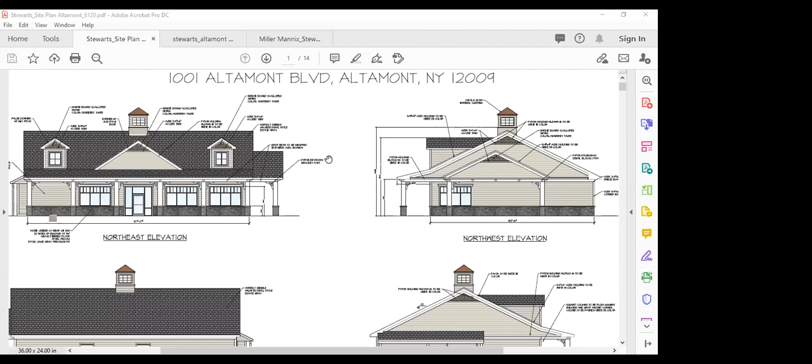So as you can see, and I'm assuming you see my screen - yes. On T1, little things: we removed the gooseneck lighting and replaced it with a solid LED bar. There was some confusion about the sign at the last meeting - again, this sign does rotate or scroll to the price and then stays affixed at that price. It's not a constantly changing message board.

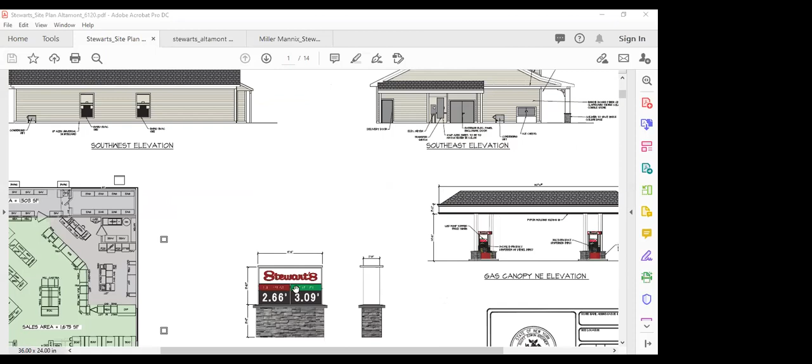Chuck, why did you change that from the gooseneck light into an LED bar light? It was just an internal switch. We felt it cleaned up the sign. It didn't change the light emitted. We can go back if you want, but there's no gooseneck lighting anywhere else on the site, so we just removed it. Is there an LED bar light anywhere else on the site? There's not, but we had to light the price somehow, and that's how we saw it best to do.

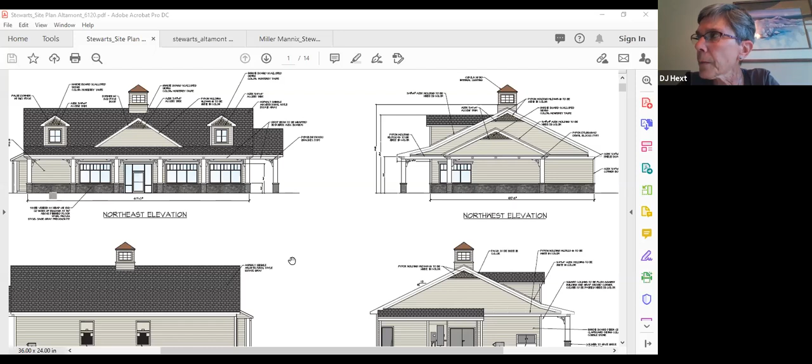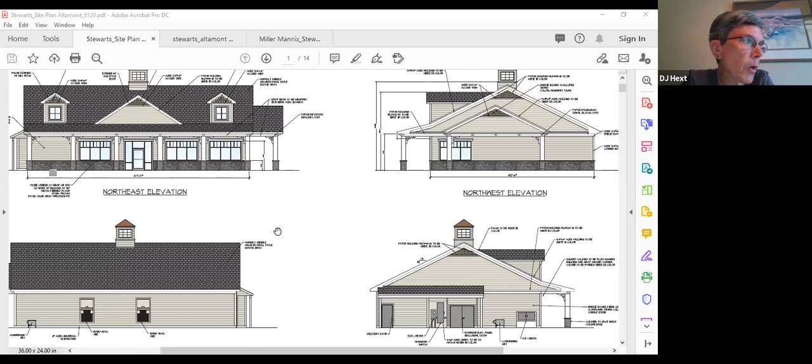From our perspective, it doesn't matter gooseneck or the LED bar. We can take a poll on this a little later. I'll make a note of it, but I don't want to hold you up - I think that's something we should come back to. Yeah, with any of these, you can do them now or later - obviously that's the board's discretion, but I'll continue and let you. Well, what does the board think about that? Gooseneck or LED bar light on the sign? Barb?

Either way, I think that the LED would be fine.

Connie? I don't have a strong opinion. The LED or the gooseneck seem to focus more of a spotlight on the sign versus the LED overhead. I would imagine it's more like what you'd find in a shop or a store. But I guess without seeing the lighting difference, it's sort of hard to tell if I prefer one to the other. Okay. John? Well, if Chuck says it emits no greater light, that the

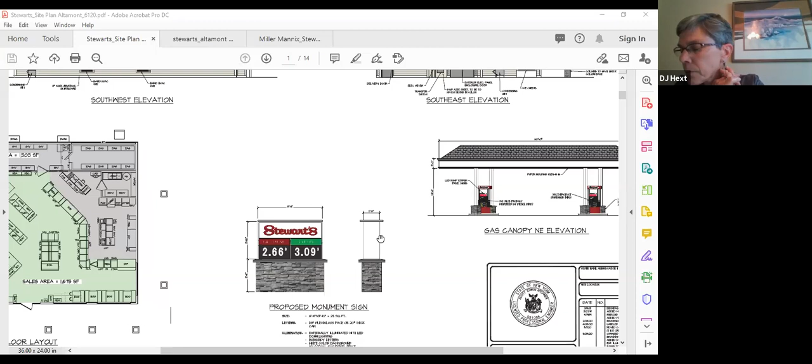Light emittance would be the same, I don't have a preference. It looks cleaner without the gooseneck. However, I would go with whichever has a lower light emittance. Steve? I sort of lean the same way as John. I think the gooseneck would, the LED probably is a little bit more of what I would prefer to see, but I have no feelings one way or the other, which is one is worse than the other.

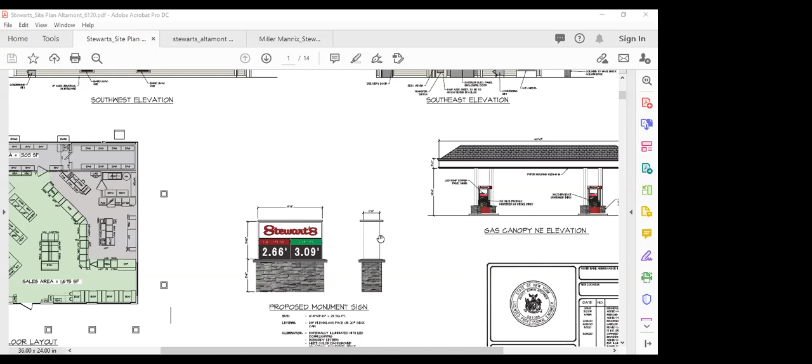It's whatever the group decides. All right, then let's leave it like it is for now. Thank you, everyone. Okay, go ahead. That's fine. That was easy.

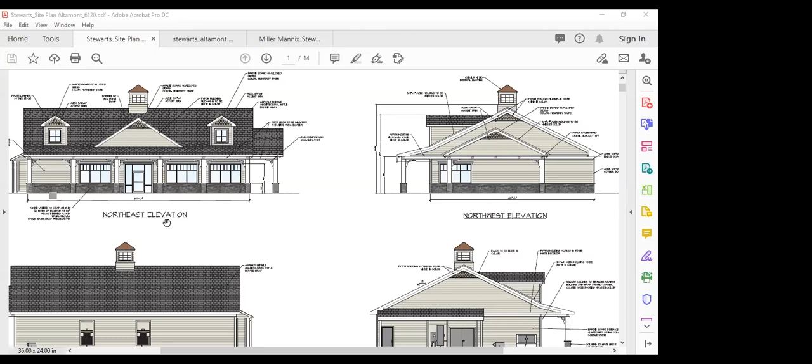The building elevations have been altered to incorporate a bluestone veneer. Again, in attachment 1, this is the closest stone we could take from the Homefront Cafe. I'm also pretty sure it's close to the small retaining wall that's in Orsini Park. So the bluestone has been chosen as the stone. We then incorporated that in the freestanding sign and the canopy column, the canopy columns at the gas pumps. We did incorporate scalloped shingle in the peaks of the dormers.

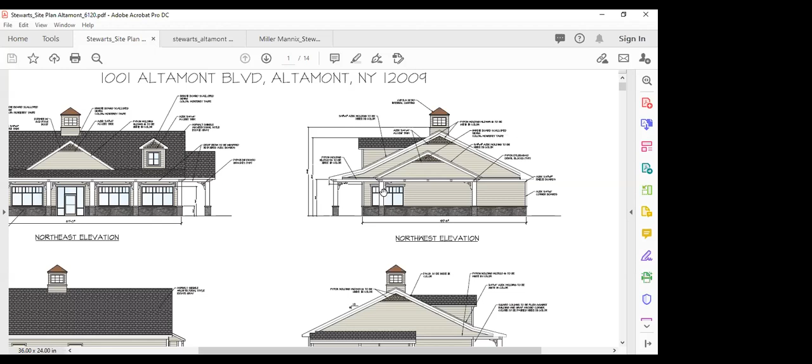We removed the smaller brackets and placed larger brackets where each column meets the roof, and dentil blocks along the roof rake. There was some discussion at the May 18th meeting or the meeting before about the cupola, and we did add a note to indicate that there will be no lighting for the cupola, so no internal illumination.

There are no changes on S1 or S2. S3, we did indicate that the wood frame dumpster would replace the white vinyl. We eliminated the plantings along Altamont Boulevard and installed the benches.

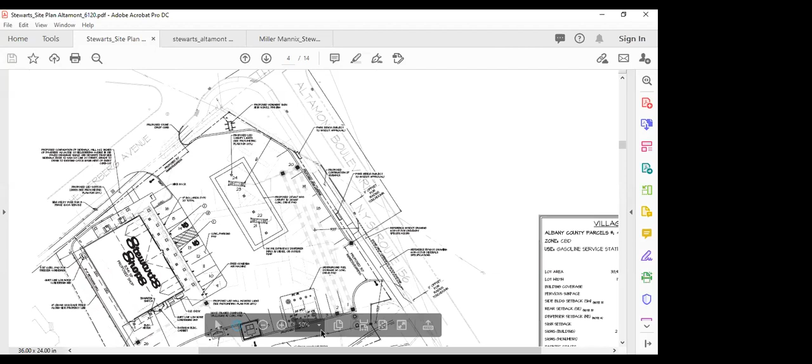One of the things I think will come up again, or as the board desires, we can handle now. Anything on the northern or outside of the dashed line really requires New York State DOT approval. So, this is our site plan, but anything outside of that may require a use and occupancy permit from the Department of Transportation. So anything that we include or show may or may not be permitted under their guidelines. And there's a fair amount of discretion that they have.

We have submitted the phase 2, and I believe maybe even phase 3 of the New York State DOT permit. In the correspondence shared for the last meeting, they are fine with the access configuration as proposed. And we're down to kind of just the details for them to issue the permit. So one of the things I think there's a little bit of a concern with was the benches, as we would like to use the benches. And again, we cited or selected benches that are seen in Orsini Park or outside the Park Row Apartments. These benches may or may not be permitted under the DOT permit.

So if the board would like to address the screening along Altamont Boulevard, I think now would be the time to discuss it. Yeah, I definitely think we need to do something as far as screening. I had sent you an email, you and Dan, an email the next day, that we need to put some type of vegetation screening back in there so that we don't have this huge expanse of macadam.

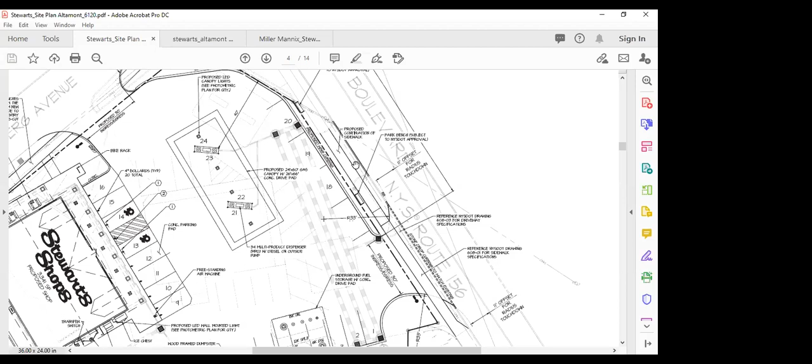The idea was that if you take the sidewalk as shown, where it's parallel with the curb along Altamont Boulevard, and move it behind the curb, basically getting rid of the snow storage area between the curb and sidewalk, it would be the same cross-section as you find on the north side of Altamont Boulevard, right across the street. That provides more room behind the sidewalk and the Stewart's lot for benches and plantings.

Does that make sense? I thought that was an excellent idea, Dan.

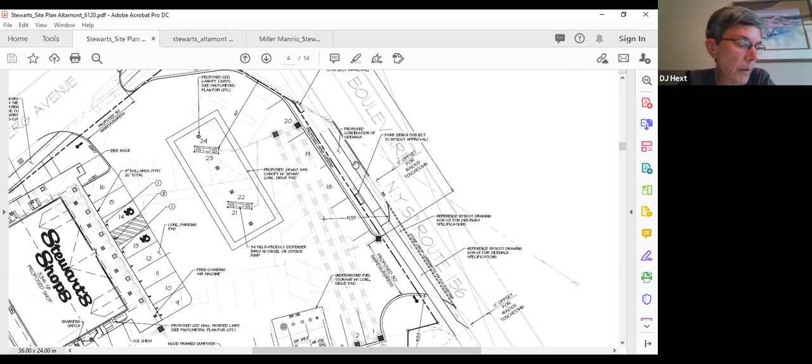The handicap ramp at the eastern end of that curb extension would still have to have the 5-foot landing at the top for ADA requirements, and then the sidewalk can taper 45 degrees and go right behind the curb the length of that extension, then taper back in when it gets toward the intersection. That would provide more room between the benches for plantings in that area, and I know it would be contingent upon DOT approval.

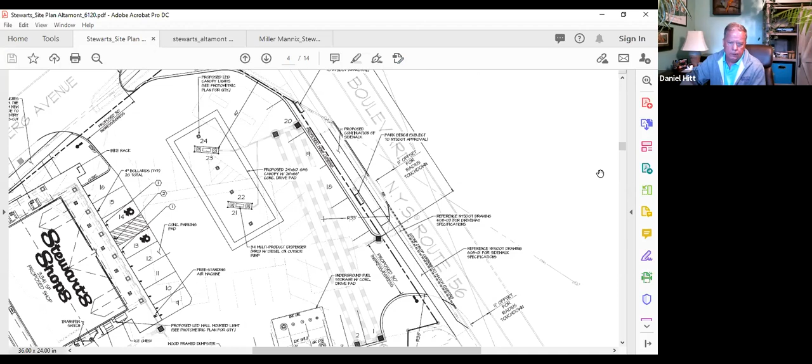I'm aware of it, you said that in your email. Yeah, shift the sidewalk to the curb, and that would provide more room behind the sidewalk and the Stewart's lot to put some plantings in there with the benches, and put the benches on concrete pads, so you're not having any plantings trampled down by people walking through there.

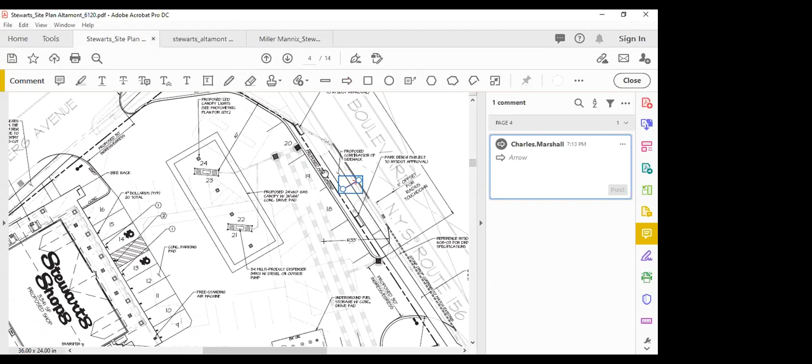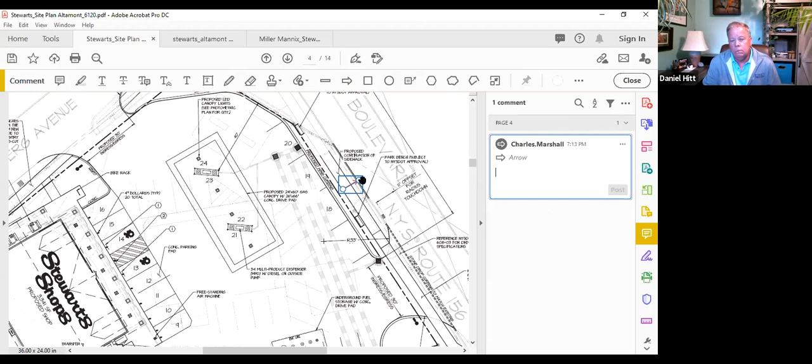So just to make sure I understand it, take the sidewalk and move it to the curb, like the red arrow shows? Yes. And then by moving the sidewalk closer to the curb, install the plantings behind this row here? Yep. Okay, yeah, the sidewalk still has to come back out to the right of that arrow to meet the handicap ramp correctly, the landing, because you still need to meet the ADA requirements. But it provides some room in between the benches there for plantings.

As long as the board is under the understanding that this would be a contingency that DOT would have to sign off on, I'm okay with that. I do think it likely affects our timing because we're at the point where DOT is getting ready to issue the permit, but I will go back to them with the change.

So just so we're all on the same page, it will be shifting the sidewalk closer to the curb along Altamont Boulevard and putting the plantings in here.

Now, Dan, I know you didn't get a chance to speak with Allison. In my conversation with her, she was pretty reliant on the junipers just because of the salt tolerance. I don't think the arborvitae would be an appropriate use here because they get so tall. No, arborvitae would not work. I think you have to keep something lower, maybe not as low as a blue rug juniper, but Andorra junipers or something like that. You need to keep shrubs low enough so they don't affect the sight distance for anybody pulling out of the driveway there.

Is the board okay with this proposed change as far as plantings are concerned? I am. I am. I am. I think that was everybody.

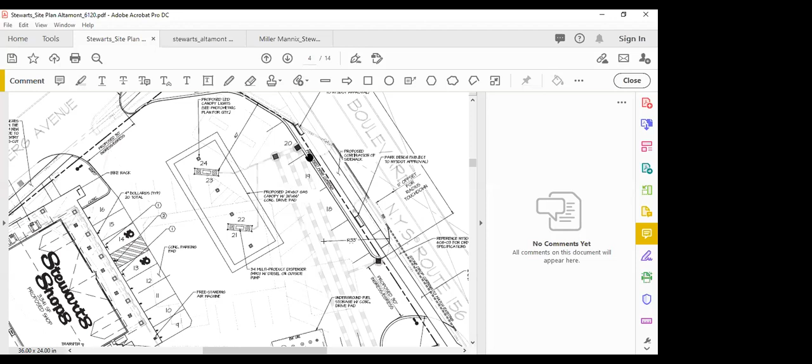That was the only revision along Altamont Boulevard, though, except for the note from Dan that the benches be placed on concrete pads. Is that correct? That's the only change I saw on Altamont Boulevard.

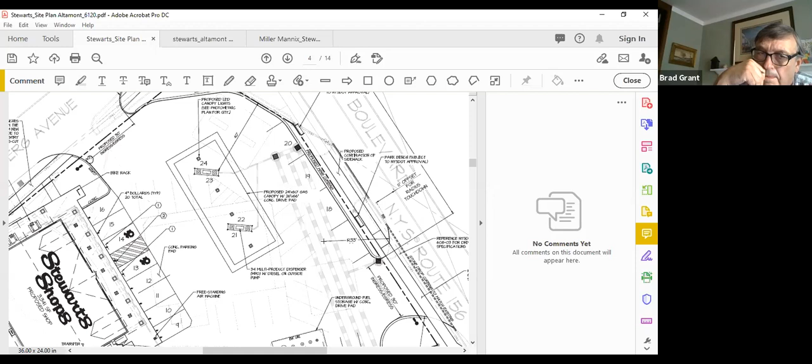Chuck, just one question: would the temporary planters still require use and occupancy from a DOT standpoint if on their land? There were none. I'm going to switch to the photometric plan. There are no temporary planters because the concern was raised by the board to go back to permanent plantings.

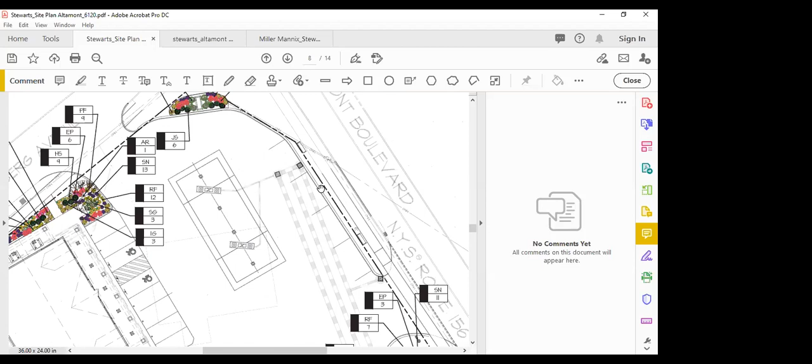So the junipers would replace any temporary boxes that would be installed, and the benches would just be placed on the outside edges of the sidewalk. Or, I'm sorry, outside edges of the curb.

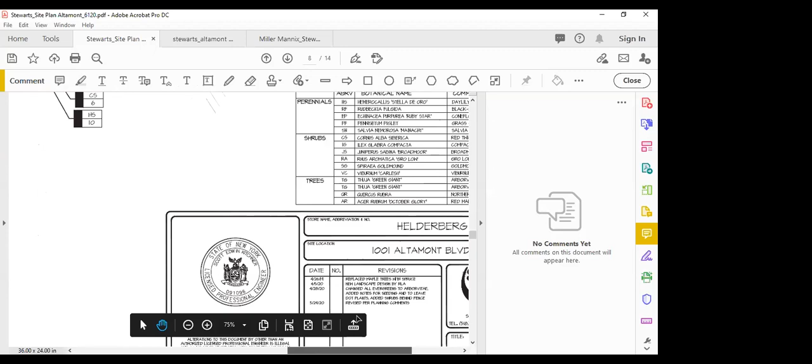So since we're here already, the landscape plan, S8 or S7, has been modified pretty substantially. It includes the dogwoods that were requested, and went to two deciduous trees in the southeast corner. The arborvitae was used for screening the fence along the 111 Helderberg property line. This is the minimum of 6 feet, and in the 16-foot range where there's separation, that's where the deciduous trees have been planted.

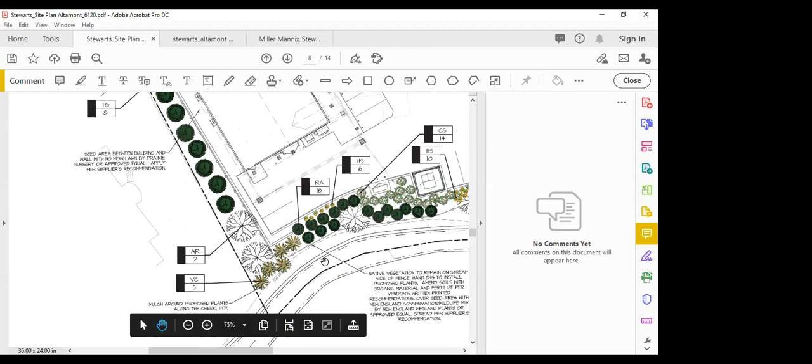While we're talking about 111 Helderberg Ave, I saw Carol join the conference. She and I have met a number of times, and while we agree to disagree on certain elements of the project, we've come to an understanding and will mitigate, as neighbors would, some of the concerns she's expressed, particularly those outside site plan issues. She has been pleasant, and I think the exchange was very mutual on both sides. Carol has been pleasant throughout this whole thing, and I thank her for that. She's one of the people that have been polite, pleasant, kind, and understanding.

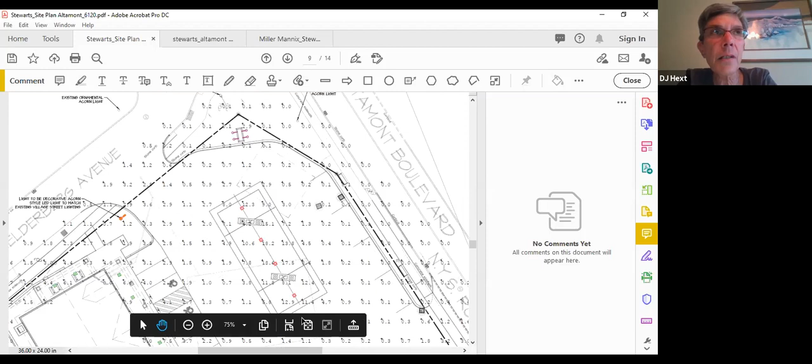But while we're talking about Carol, let me ask you a couple things. The condensing unit that we can't move — is that the one that's the quiet climate 2? It is, yep, and the cut sheets were provided in this submission, which were omitted in previous submissions. I looked that up and saw that in an audiology lab the quiet climate 2 lowered the decibels from 57 to 37, which is equivalent to a library conversation.

Have you heard anything like that? Has anybody heard that?

I measured them in other situations. The benefit in this site, as I've gone through repeatedly, is the condensing unit sits in an approximate 3-foot hole with its back to a stone retaining wall, and atop that sits an 8-foot fence. I think the cedar fence being solid makes it a better barrier, a better buffer, than the vinyl would have been, because the vinyl components would have been hollow. So I do think that's favorable.

But as I expressed to her and the board previously, the only other location for that condensing unit is on the Helderberg Ave side, and on that side you do not have the benefit of the 8-foot fence. You do have a segment of the retaining wall, but not the fence, and you'd simultaneously introduce it to the picnic area, the funeral home, and all the other Helderberg Ave residents. So these are the best locations for the condensing unit and HVAC, and that's why we have not moved them since the original submission. When we were asked to move the condensing unit for the cooler, there was obviously much more room along that unit to do so, and we did. But here we could not and will not.

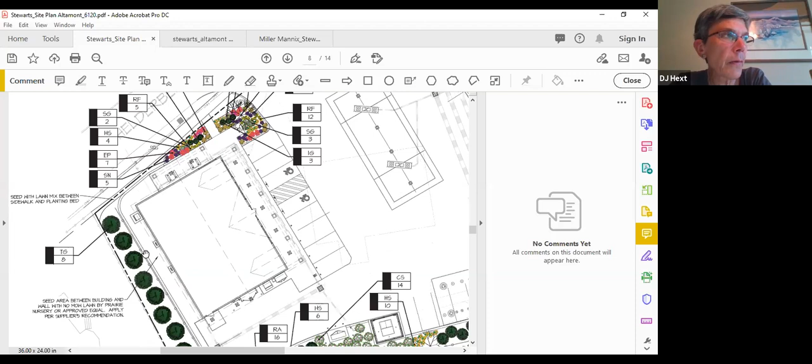I think we need to do everything we can to mitigate the sound trespass as opposed to light trespass to the neighbors. We may not have anything specific in our code, but this is why we do this, is to try to get some concessions to make it the least possible intrusion to neighbors. So I think we can work through that.

And maybe this information, the catalog cuts, they say enhanced sound absorption, they say quiet operation in another place. I suspect it has a pretty decent sound rating. I was a little, I guess mortified isn't the right word, but surprised when I got to the sound data. It had TBD, to be determined. Maybe that was when this was being manufactured and put out 2 years ago, and maybe they do have that sound information. A call to their factory might yield an answer, but just to keep it in context...

The two condenser units were 52, and I believe 58 decibels, if I remember correctly. So a little quieter, but you would expect those versus an HVAC unit.

Deb, just to add to your comment about it not being in the code, in 355-36 we do say protection of adjacent properties against noise, glare, unsightliness. So we do address unsightly noise. So I agree with the blankets and what you're saying. Again, the only mitigation I can consider that we haven't already done would be the blanket.

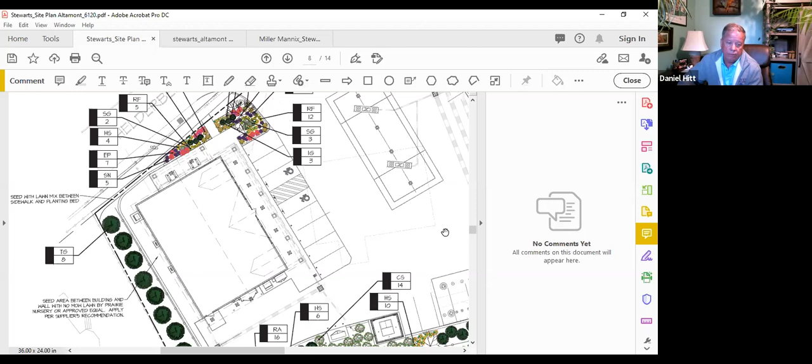You want the blanket the length of the building? No. Can you put the cursor over what the... So what I was saying is, from this unit to this unit is 36 feet. Right.

So you want to continue it?

If you take a line from the condensing unit to the bottom, and at an angle projected to Carol's backyard, you're going to have maybe a 45-degree angle. So the blanket would actually go a little further, because from the source of the noise to the usable space in the adjacent property is how sound travels. So the blanket doesn't stop at the end of the condensing unit, it would extend a little further.

Make sense? Yeah, I'm just trying to provide - I'm not saying it would be much longer than 36 feet, but if you take a line from that unit, it looks to be about 45 feet. Yeah, something like that.

I really think that the retaining wall and the fence are going to add some abatement already, because breaking the line of sight with something solid is how noise walls are designed. I've done it for years. So adding the blanket is only going to add that much more additional abatement, because it makes that cedar fence more impervious. Yeah, it's like a double layer, like wearing a sweater under a raincoat. Right, you're right - the raincoat keeps you dry and your sweater keeps you warm. Yep, so we're good.

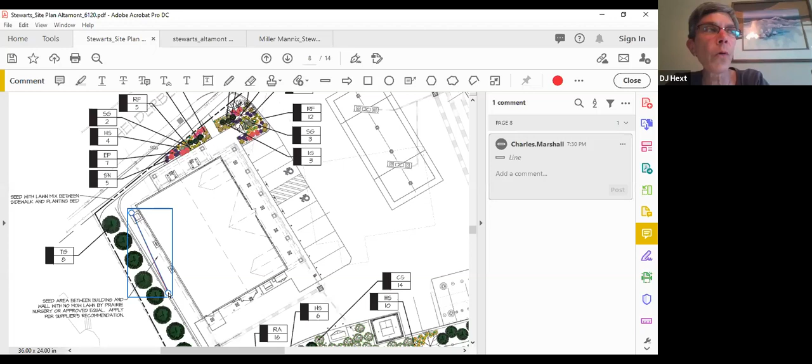Okay, thank you. Now the only other question is, who maintains that fence? Is it Stewart's just does, is it going to be weathered, or will you seal it with something, or what was the plan for that? That was another one of Carol's questions. I'm just making sure, because I don't know that we hit on every single one.

The last round of submission or conversation had kind of no plantings in this area, so the plantings, I think, add some screening between her property and the fence. But it would be natural cedar, untreated. Okay, all right. And you'll maintain that - if one of the slats break or becomes rotten or whatever, Stewart's is going to take care of that.

Yeah. I personally, it's unlikely I will inspect it, but if Carol has a problem, she definitely knows how to reach me. Well, I don't only mean her fence, I mean the fence around the dumpster and all that. That's all going to be maintained by Stewart's, correct? Yep, it's on our property.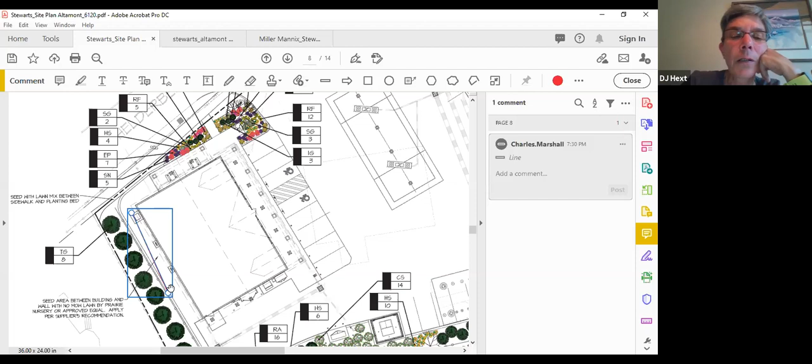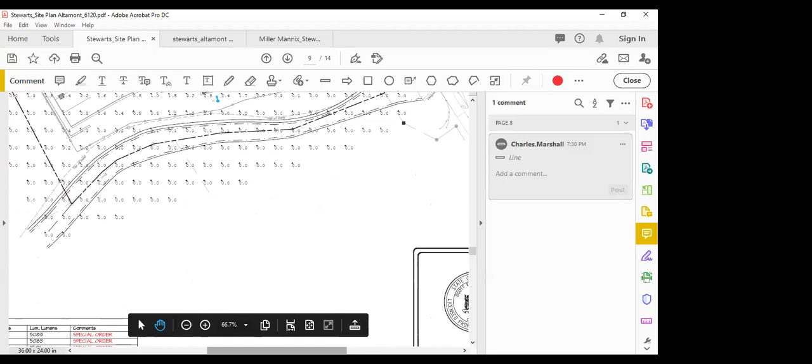So this is probably the last, these are the last changes I highlighted. I think we'll probably spend some time discussing. The decorative fixture was incorporated in the two driveway entrances. We did the two decorative fixtures in the driveway. The Altamont Boulevard driveway would be back shielded lights. The Helderberg Ave would not. They would both be an Acorn style fixture that would match the fixture that's in the current DOT area on the corner.

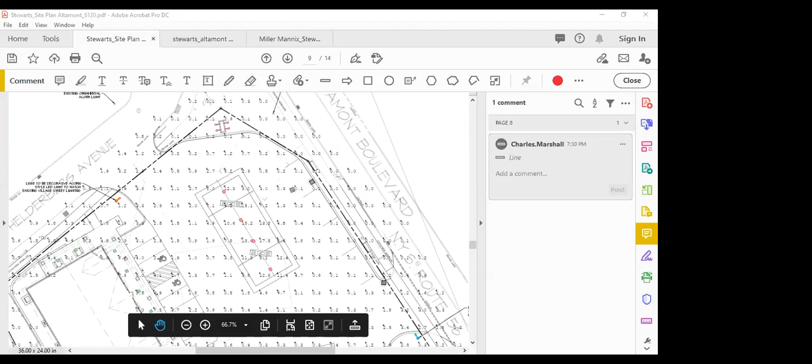In attachment 2, we did provide - can you see me scrolling? Can you see the lights I'm pulling up? Yes, okay.

So the first lights were the lights on 147 and 67. Again, as indicated, this property is on the southeast corner. On the northeast corner is a cemetery on the historic register, and on the southwest corner is a church on the historic register. Our lighting there was compliant with the SHPO guidelines. That lighting is in the 4,000 Kelvin range, and then here is light at the 5,700 Kelvin range.

We provided some samples to the board and the public through the link that showed various lighting. This was the kind of 5,700 or 5,000 Kelvin light, and we provided about 6 of them to you. What we were able to do after that is, can you see the photo that's now across my screen? Yes.

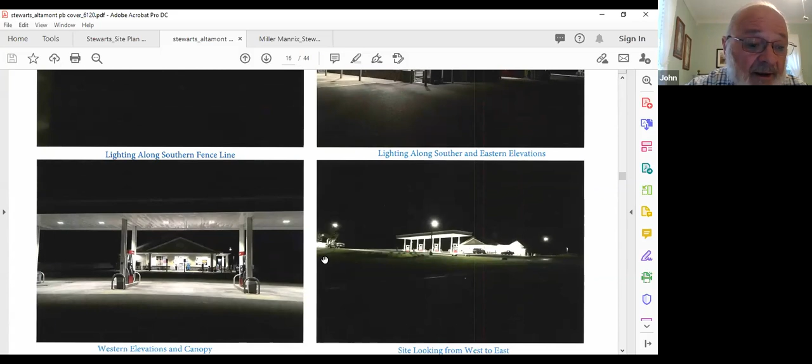But looking at your pictures here, the gas canopy looks similar as I remember it. But the store, as I remember it, is a heck of a lot brighter than what I see in this picture. I took pictures from the gas canopy, in front of Stewart's, and across the street kitty corner at the walk-in health clinic. From the health clinic it just had a glow at night, and I don't want that in Altamont. If that's what's going to be, I don't think it's going to look good at all. When I looked at that location, the most bright thing I saw at the intersection was the blue light in the urgent care signage, less so the Stewart's.

The Stewart's really isn't even visible as you approach from the east. You have to remember that the 147 and 67 building is four-sided. So effectively, you would only get the...

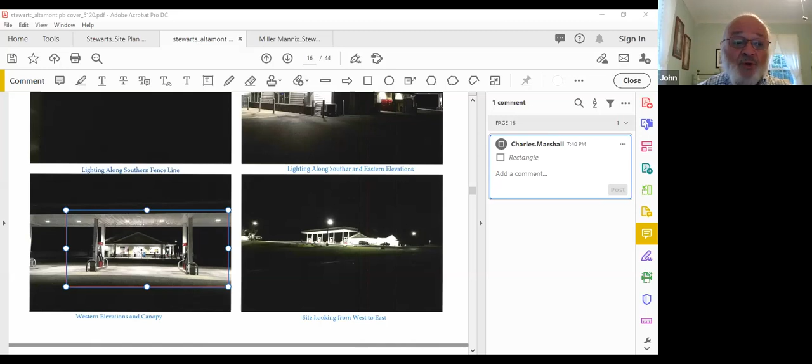Is it the same lumen output under the canopies, Chuck? The canopies are good, they're more subdued, and that wasn't the problem. The problem is light coming from the building and around the outside of the building. John, this is Steve, so you're basically saying the inside of the building was what you're talking about?

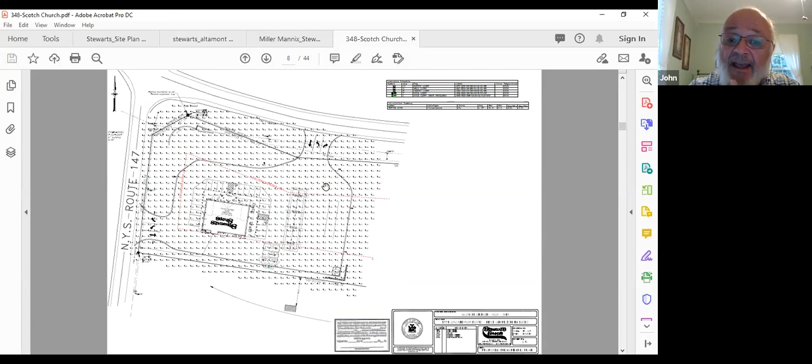Well, when you're standing in front of the building, you're not sure how much of that light is coming from within versus outside. I'm just saying the whole thing glowed. Yeah, I've seen it myself. I just was curious what you were trying to emphasize.

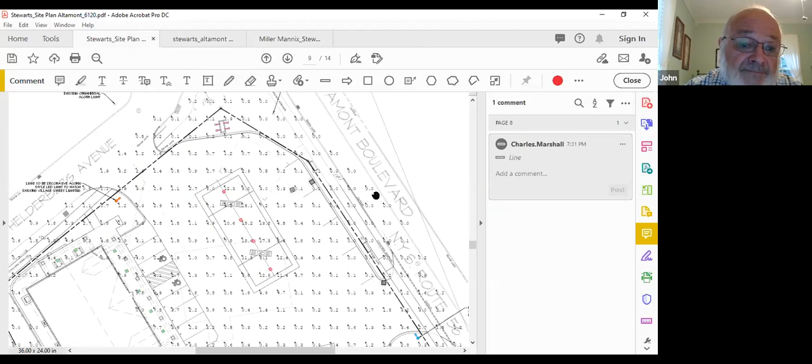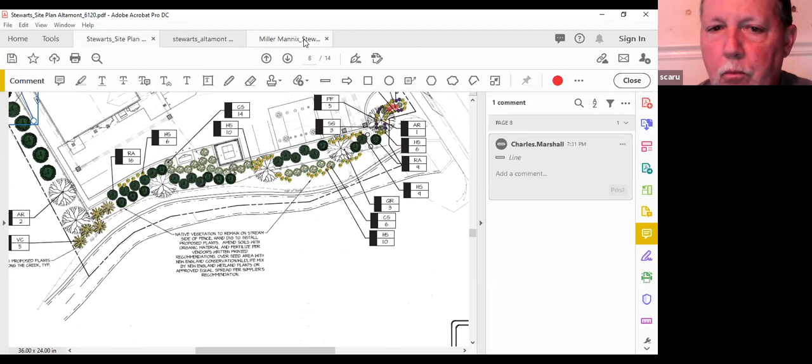And that's why I asked Chuck if the interior lighting was exactly the same as far as the illuminance at this location as it's going to be in the new Stewart's, or if this is going to be brighter like the Stewart's here. It'll be about the same.

What I'm trying to find, I mean, it'll be, there's one that's in a darker place than this will be in. I mean, the setting itself, correct? I mean, yeah, those two corners, the southwest and the northeast corners, are completely dark at night.

The urgent care center is on the northwest corner, which is the former Stewart's, and is somewhat illuminated. Again, the largest light issue is the bright blue sign that the urgent care was allowed to put up. All the light here is essentially pointed into the central business district. The lights on the canopy, which John does not seem to have a problem with, are the most visible lights.

We did switch to the decorative fixtures on the outside. What I could do, again, as a kind of condition, I would be willing to decrease the number of soffit lights under the porch.

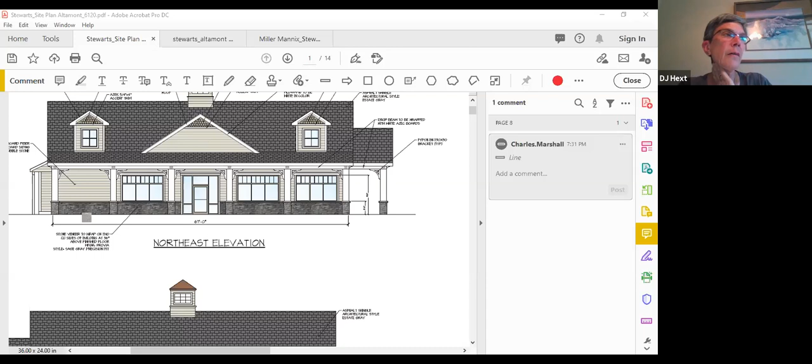Can you put up that comparison again? Remember, you put up a lighting comparison that showed the coolness versus the warmness, that chart you showed? It wasn't in the last mailing, it was at a meeting. I did not, but hold on one second. It went from the yellow to the white spectrum.

Yeah, exactly. I'm just thinking, throwing this out there, their lighting does meet code and in some cases exceeds code. So I'm not sure how much we can push this.

Can you see it now? No. Could this be as simple as a different lens cover that has more shielding to it? Shielding, yeah. Brad, you see it now? Yeah, there it is.

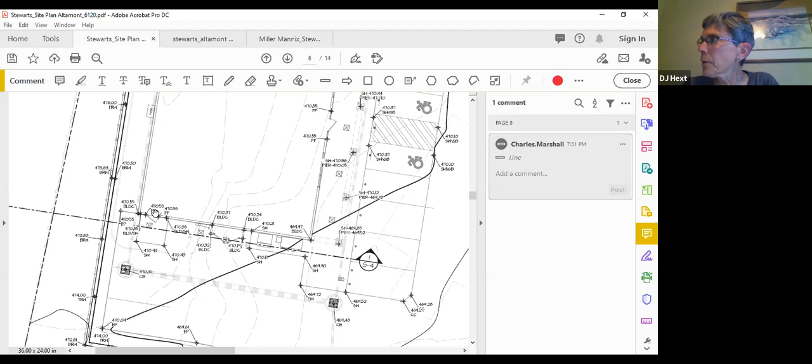Correct. Because they're downcast lights and she would essentially be over them, she wouldn't see them. So then you've eliminated 2 of the soffit lights along that front elevation. So you're eliminating 8,000 lumens then, if each of those soffit lights are 4,000?

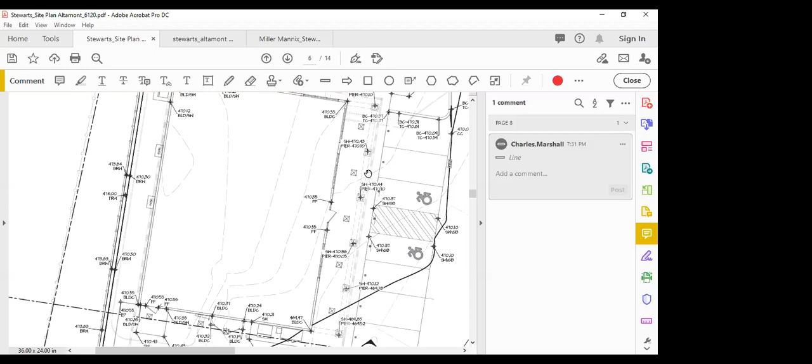I don't think it's linear. Because we look at it as more of like a foot candle than a lumen. There is a conversion, but you're basically compressing the foot candles to 2 areas versus 5, or 3 areas versus 5.

This is Allison. It might be helpful at this point to look at the standard in our zoning law for special use permit relevant to glare. I'm looking at 355-35E6, regarding the use and proposed design of the building and site facilities being appropriate in that location, and having incorporated reasonable efforts to harmonize with surrounding uses and mitigate any adverse impacts on surrounding uses, including but not limited to glare. So for a special use permit, you're really looking at whether they've incorporated reasonable efforts to harmonize with the surrounding uses and mitigate adverse impact on surrounding uses.

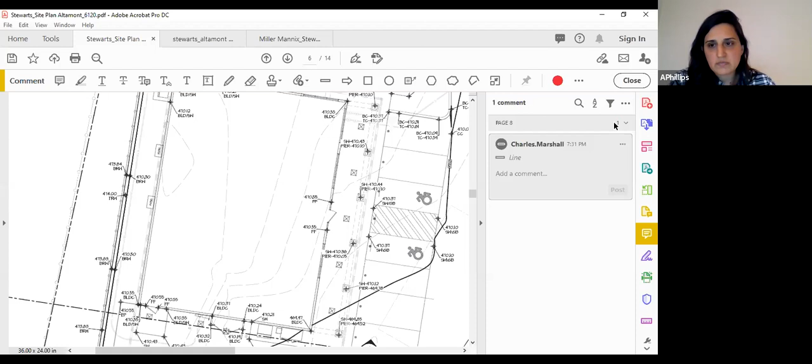Thank you, Allison, which is why I was trying to get to that saying they do meet our code, and they've actually done one step better than what we say they can have. So do we as a group feel that they've mitigated in every way possible the impact on surrounding areas and tried to harmonize with the surrounding area? Remembering there are other businesses in that area - there's Altamont Corners, there's the home front, there's Veronica's. Those aren't all dark all the time.

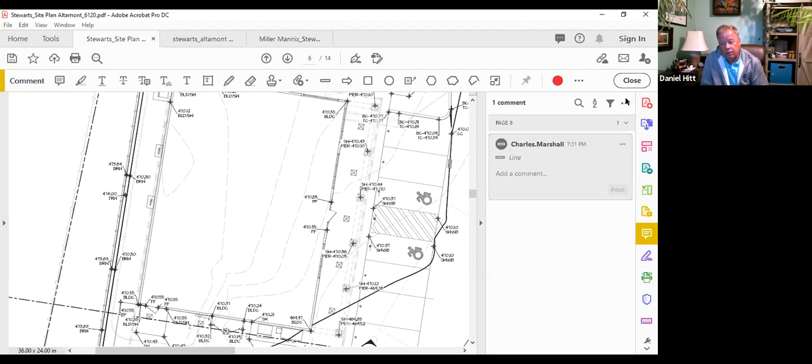I think by eliminating the 2 soffit lights, he met that standard. Well, I think they have also, one point that hasn't been mentioned, it still needs to remain safe. There's going to be a lot of pedestrian potential conflicts with vehicles in front of that store, and it still needs to be lit well enough so that people can see. I agree with Dan, I think it's important for the security lighting. And I do think Stewart's has come back and they're doing the best they can to accommodate us. I think the plan as it is now is a good plan.

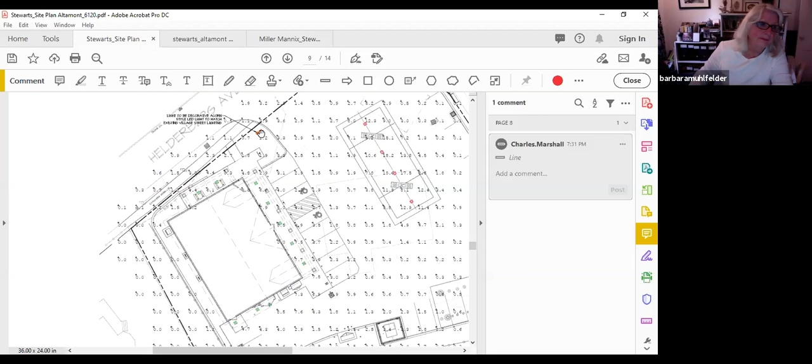Okay, this is Steve. Does everybody agree we can move on from the lighting part here?

Yeah, but this is Steve, I've got one thing I wanted to say. I think one of the issues we're all having to a certain extent is this is a completely different style building than what we have there now. When you try to compare lighting and visual from a brick building that's been there for a long time, which may look obviously different than what Stewart's is proposing, that may have something to do with, at least in my mind, the lighting aspect of it. So I think Stewart's has done everything they possibly could with what's been handed to them on that lot with the lighting.

Hey Chuck, sorry, my computer glitched or something. I thought I heard a motion.

Chuck, one question - the 2 examples up north here, do they have as deep of a front porch as is being proposed here? They don't, they only have shorter porches, just kind of like the gable with the columns. And again, that's what I'm trying to get at - there's circulation around all 4 sides of those buildings, so the lighting's just different. They have more yard lights.

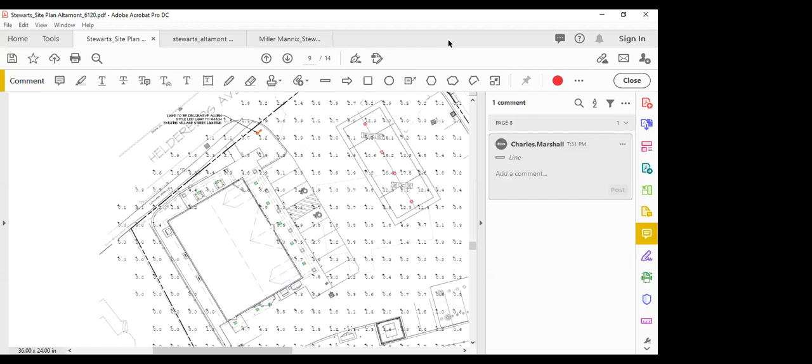No, we kept the lighter siding because we went to a darker stone. But the porch does somewhat head into a gray building, which is dark with the dark stone. I tried to make a point that the porch somewhat envelops some of the light from going upward and outward to some degree. I agree, Brad, good point.

Can we move on from the lighting? Sounds good, Deb.

Chuck, have you summarized all the changes you just sent us? I'm not even sure where we left off now. Yes, so basically, despite significant conversation, there are 3 changes: the 5 soffit lights along the northeast elevation will be changed to 3.

A 45-foot sound blanket will be added, measured from the building corner to the southeast along 111 Helderberg. And the Andorra juniper will be selected as the planting along Altamont Boulevard, provided the New York State DOT is accepting of the plan.

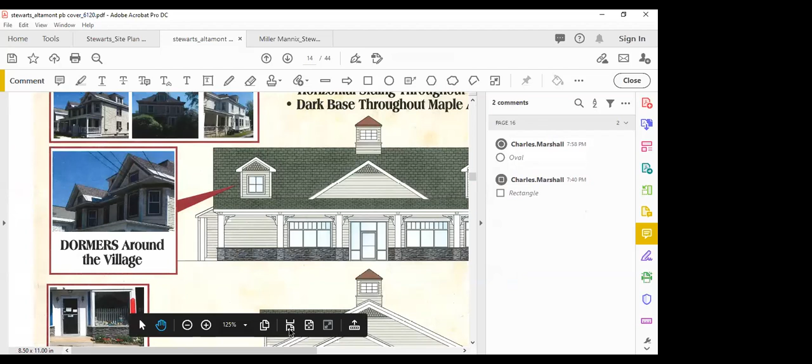Maybe that is Crayola. Enough HGTV, Connie. Yeah, I mean, it scans in, it's tough. It's just kind of put on a... not the, it's put on like a yellowish background. It's kind of a series of beiges, I guess you would say.

The building that's in, I don't know what you consider it, Latham or Loudonville? That's yellow. Yeah, is that yellow or is that a tan? Because I went by there the other day. I was going somewhere and I love the color of their stone. So the one on Loudon Road is yellow.

The one on Wade Road is tan. Yeah, I think that was on Loudon. Where Hoffman's used to be? Yes, yes. Yeah, that building is actually yellow. Okay.

Does that help at all, Connie, or? I guess I was thinking with the stone, I thought we had talked about a light gray for the building and a darker gray for the scallops. But we had talked about that. I think because we had mentioned at one point the blue stone or something, maybe that's why they went back to the tan. That's exactly right, so we came as close as we could to the bluestone with the stone.

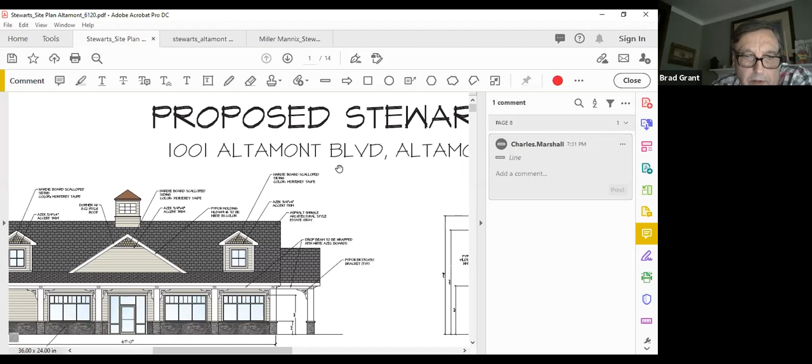I agree. Chuck, do you still have those Queen Anne's posts for the dormers? They seem gone now. Yeah, we removed those.

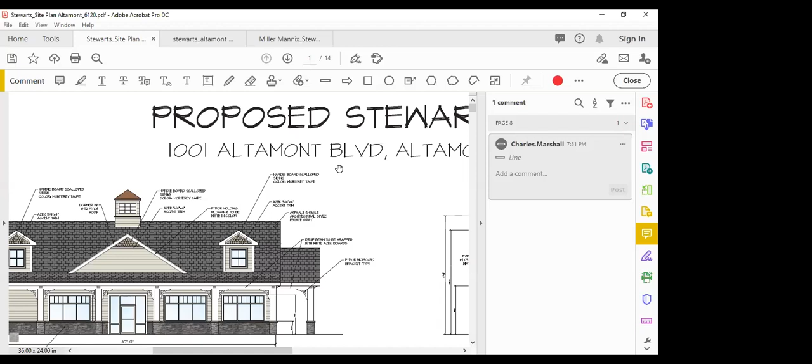And are you doing the column bases like we talked about down on the porch? Oh, we looked at that. We took that out. The concern was that it creates more of a trip hazard. You're talking about the crown, kind of a match. This area here. Yes, we looked at it and we'd rather not do it because it extends the column too far and doesn't have the perceived benefit. I mean, it's just a view.

What I'm talking about is a piece of Fypon that has a hole in it that matches the column diameter, but doesn't go out as far as the stone does. It's a white polystyrene column base.

So the last course of stone would be raised 4 or 6 inches, and then the coping would be that thickness? Or is there concrete on top of it, and then you put the coping on top of that? I guess, yeah, I just don't see the benefit of it.

Brad, this is Dean. Just to clarify, those are not round columns. Correct, just wanted to make sure you understood that. Yeah, you had said round. Oh, those aren't round columns. They're square. No, they're square. Okay.

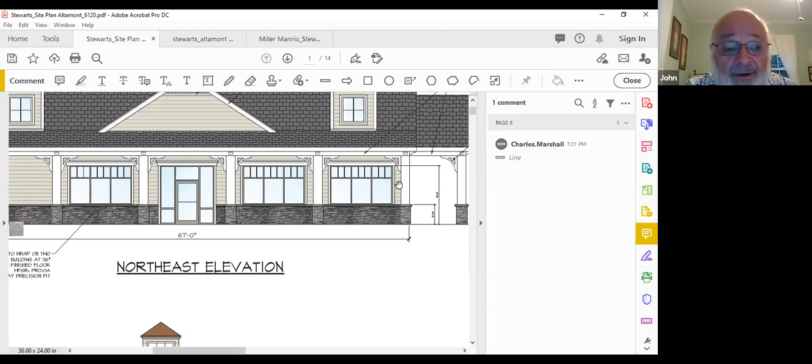I brought this up before, but in the report Barton & Loguidice, with regards to the stream, said there was moderate wear, washout or erosion, however they put it. I still think they ought to put gabions in that area. There's gabions above, behind Carol's house, gabions below the existing Stewart's, and in that one area where the house was taken down, there's nothing. I think now is the time to put the gabions in instead of waiting until the moderate erosion goes to severe erosion, and something has to be done after the store is up.

Do we need to go on the stream bed to do that? Because if we do, then that's a whole other ballgame. Yeah, you do. So then, well, I was under the impression that between Dan's conversation and Brad's conversation at the last meeting, the proposed planting scheme was the more desired mechanism for handling this than the gabions.

If one of those two gentlemen can clarify. Yeah, I thought Brad said that, and I thought Dan said that as well last time.

Yeah, I'll add to this. I've dealt with the Corps of Engineers and DEC for 36 years. They do not want hard materials like gabions or anything else when the green approach can be taken. So unless it's a flood control project, the permitting would be very difficult and would take a long time to justify getting the Corps of Engineers permit to do the work, from my experience. I think the green approach with the plantings is a far better idea, and it's what's usually promoted by DEC and the Corps of Engineers.

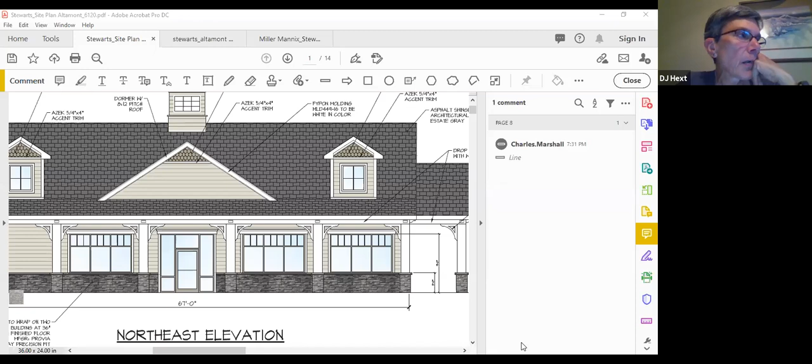So in your estimation, you feel that they've met the standard, or have mitigated any issues that may have existed? Yeah, I do, okay, yes.

Connie? It might be, I'm sorry, this is Allison, if I can just interrupt one moment. At some point, and it sounds like it may be, following this meeting, I'm going to look to the board to give me some direction as to how they would like me to draft up a decision document that the board could then come back, review, consider, and have a final vote on.

So as we go through this, I think, Deb, this is a good approach, where we're focusing on whether there are any board members who feel there's any particular standards that warrant further discussion, or that they don't feel the documentation in the record establishes the standard's been met. But even if you do feel the standard has been met, feel free to mention anything specific that may have influenced your decision, such as thinking about mitigating measures, what we talked about tonight with the changes, reducing the number of soffits in the lighting plan. Anything you feel is of particular importance that should be incorporated into the board's final findings and decision.

Thank you, Allison. Barb, does that change anything for you?

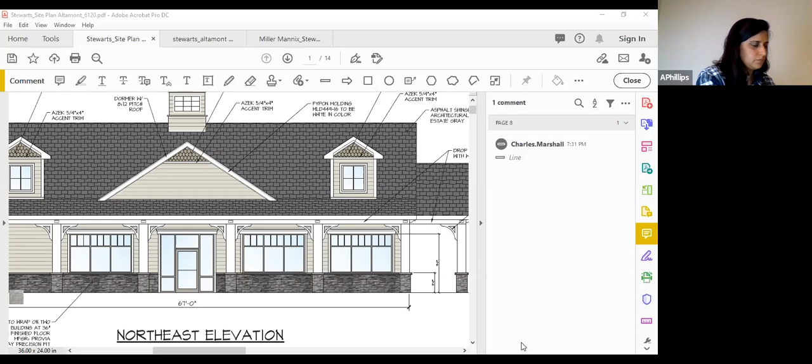Okay, so for the first one, it talks about the scale and the physical design of the whole project. I guess I just want to comment that it's been a struggle from the beginning. There have been several hurdles that had to be overcome.

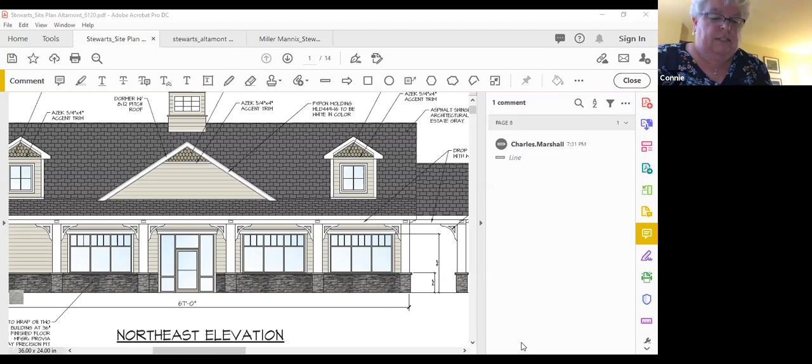First by the village board, and when they did the SEQR declaration, even though it ended up being negative, they did have 3 factors that they considered to have a moderate impact on the village: whether the proposed action would create a material conflict with an adopted land use, whether the proposed action would result in a change of use or intensity of use, and whether the proposed action would impair the character or quality of the existing community. So the village board did consider all of those to be moderate impact.

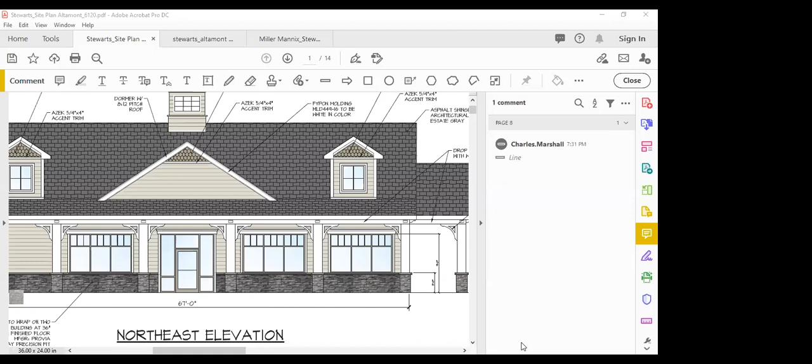And then when it went to the zoning, the ZBA board, there were very large variances that had to be addressed: allowing the gasoline service station on a smaller lot size, having the building 30 feet closer to Carol's property than the zoning was supposed to allow, and 90 feet closer from the boulevard. And I know we have really struggled in particular with being 20 feet from Carol's property as opposed to 50, with the noise and the fencing and the landscaping. So I just want to say that this whole process has been a struggle because of the scale of the project.

The other thing was number 6. Somebody read it tonight, but I think we've made some good progress with the noise and lighting. When I wrote my notes up before, we were still struggling with those. And the last one was number 8, in terms of property value. I know at some point we received a letter from Carol indicating concerns. She had discussions with the real estate folks about the negative impact on her property value.

Do you feel that what we've struggled with has been mitigated in the best possible way? I think we've struggled with it, and I mitigated as much as we've been able to. But it's been difficult to meet everyone's needs, to make the project satisfactory for everyone, and that's been very difficult.